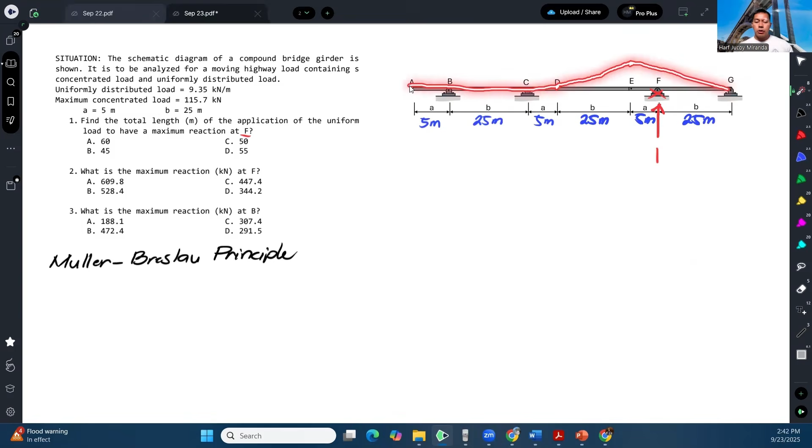Okay, that's the nice thing about this principle. You will be able to draw the influence line diagram faster. So that's the shape.

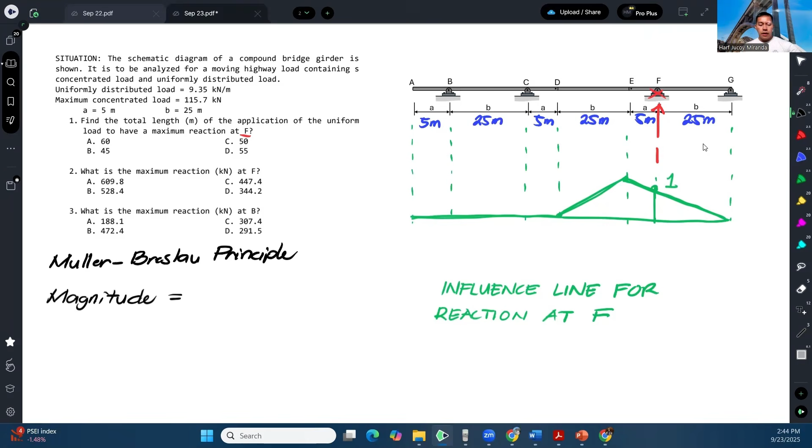So that means, the idea stays the same to get the magnitude of the force you're looking for - this is general. It will be the concentrated load times the ordinate. For a uniform load, you multiply by the area.

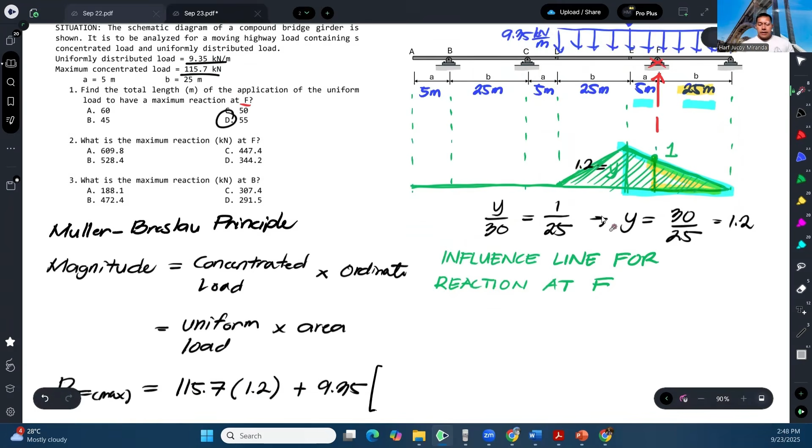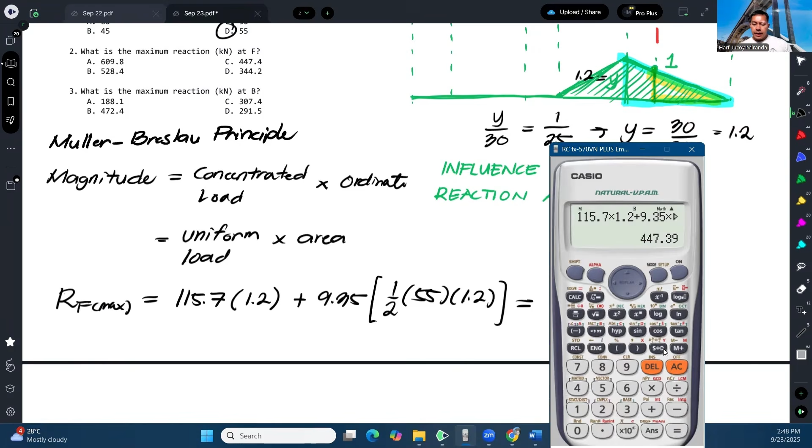So we have 115.7 times 1.2 plus 9.35 times 1/2 times 55 times 1.2, and that gives us 447.39 kilonewtons. And that will be our answer for the first one.

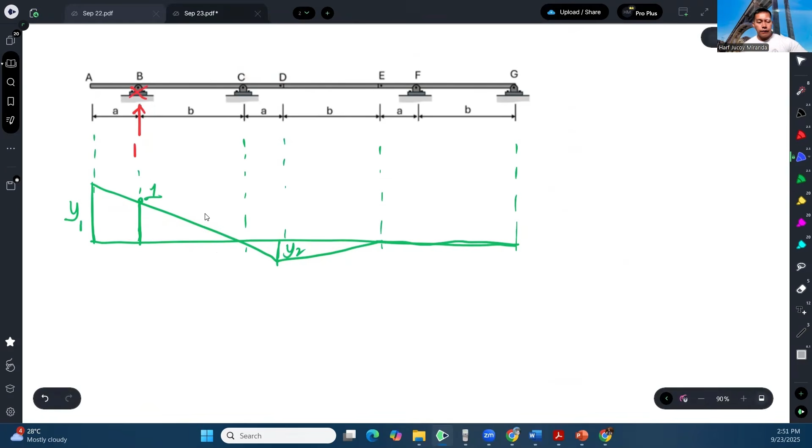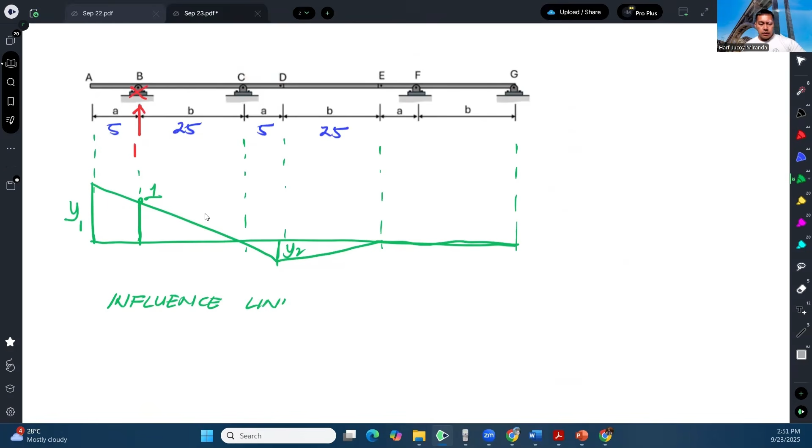Okay, for reaction, you have to be specific what kind of load. So, reaction at B.

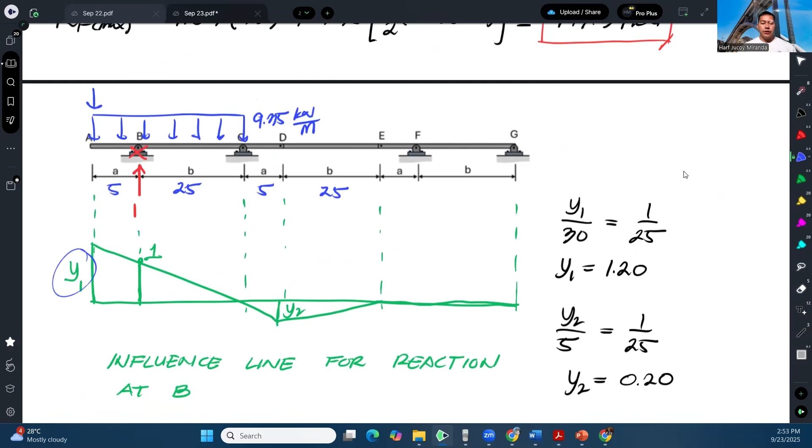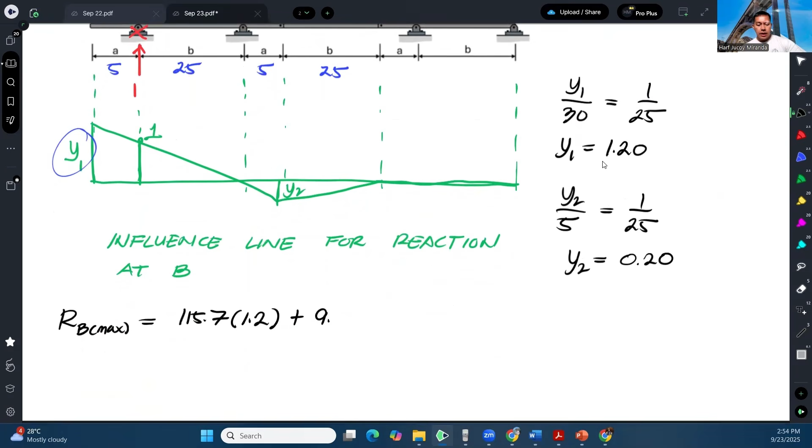So therefore, we can now calculate. So the maximum reaction at B is equal to the concentrated load, 115.7 times 1.2, the ordinate, plus the uniform load times the area.

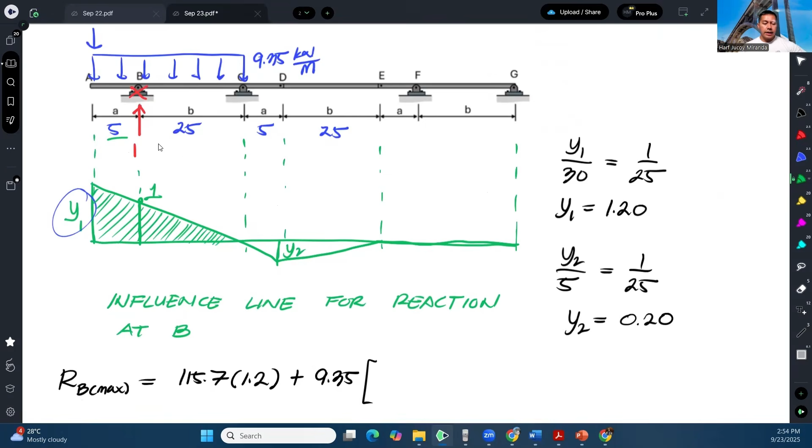The area of that. So 1/2 base, our base is 30, and our height is 1.2. And that will give us the maximum possible reaction at B, which gives us 307.14 kilonewtons.